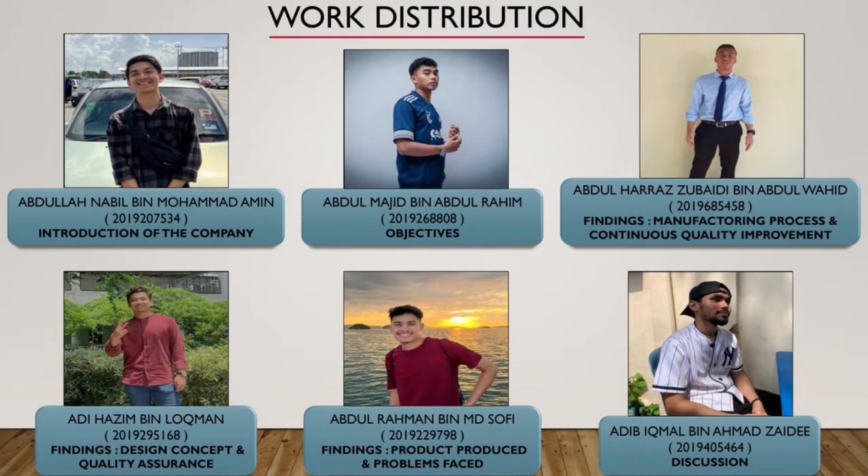My name is Abdullah Nabil, and today I will introduce to you Brembo Company. As we know, Brembo specializes in performance braking systems and components as well as conducting research on braking systems. Brembo sells over 1,300 products worldwide and is known for their aftermarket automotive brake components, including calipers, drums, rotors, and brake lines. Brembo owns the foundries that produce their initial materials and supply the manufacturing plants.

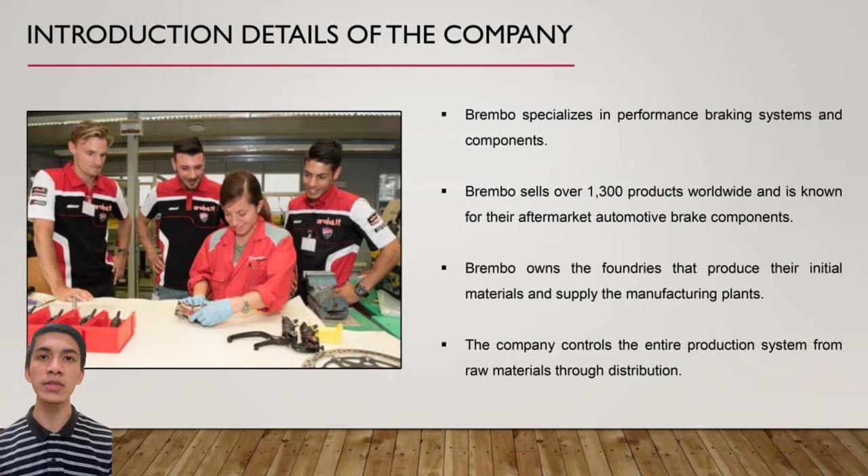In all other markets, the company controls the entire production system, from raw materials to distribution. Brembo was established in Paladina, Italy in 1961 by Emilio Bombassei and Italo Breda. The company entered into a supply contract with Alfa Romeo in 1964 and became Moto Guzzi's brake component supplier in 1966. In the 1980s, Brembo also began supplying brakes to BMW, Ferrari, Mercedes-Benz, Nissan, and Porsche. Brembo went public on the Milan Stock Exchange in 1995.

In the 2000s, Brembo purchased the UK-based racing brake and clutch manufacturer AP Racing, a former division of Automotive Products. An official press release in 2014 announced an RM392 million expansion of the Michigan facility. Later that year, Brembo also announced plans to invest RM151 million into a 31,500 square meter production facility project to produce 2 million aluminium calipers yearly.

In 2015, Brembo's deputy chairman, Matteo Tiraboschi, reported the company's 2014 sales growth of 15% and a net profit increase of 45%. For now, Brembo is a world leader in the design, development, and production of braking systems and components for vehicles. The company currently operates in 15 countries on 3 different continents with 29 production and business sites and a workforce of over 12,000 employees.

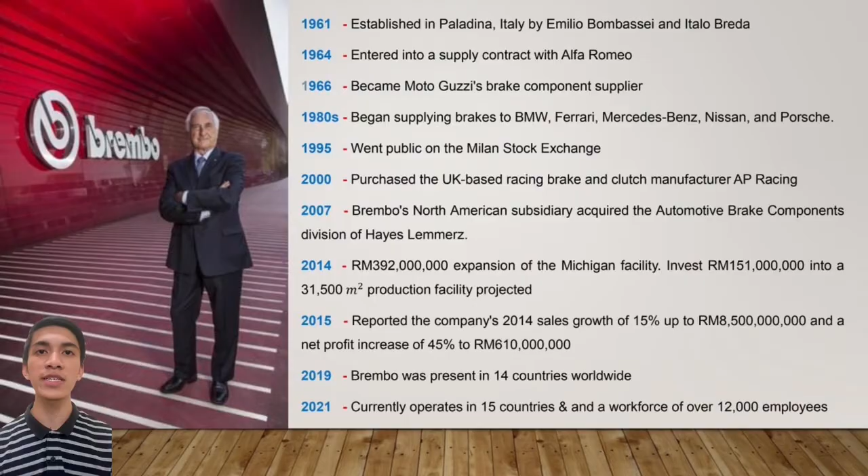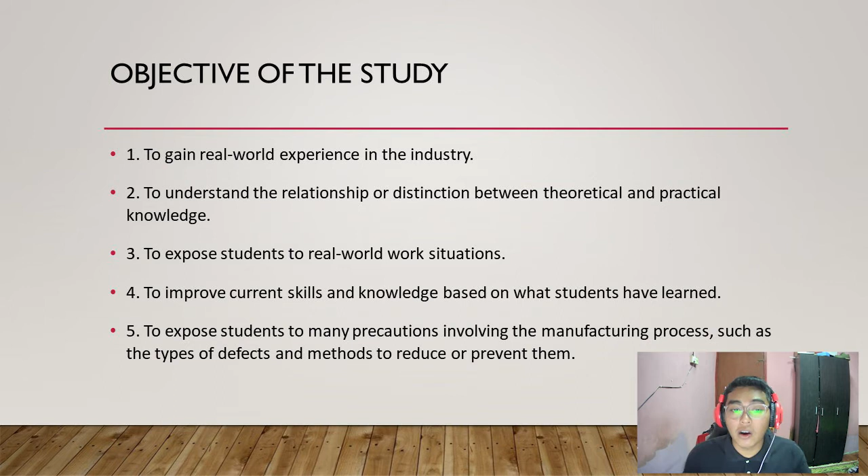Today I will present the objectives of the study. The first one is to gain real-world experience in the industry. The second one is to understand the relationship or distinction between theoretical and practical knowledge. Number 3, to expose students to real-world work situations. Number 4, to improve current skills and knowledge based on what students have learned. And number 5, to expose students to many precautions involving the manufacturing process, such as the types of defects and methods to reduce or prevent them. Thank you.

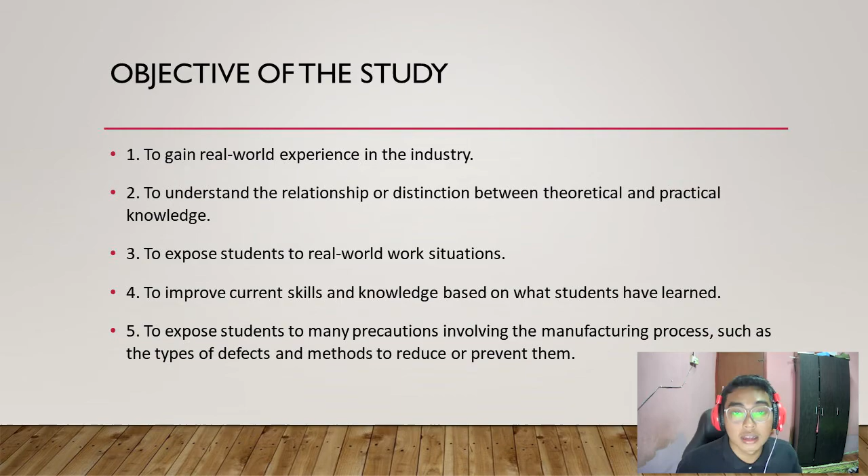There are 12 manufacturing processes that the brake discs need to undergo. First, preparing material. There are 2 materials used in this process, which are heat molded resin and chopped pieces of raw carbon fiber. Both materials are mixed together, as the combination of these materials will provide quiet braking.

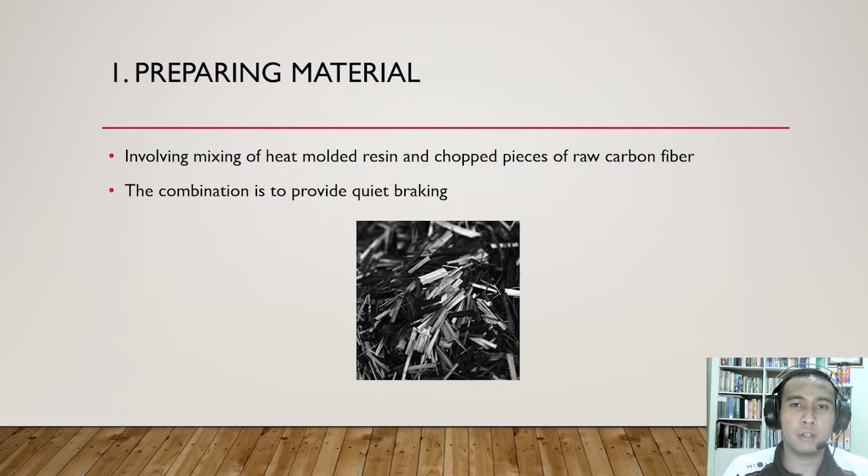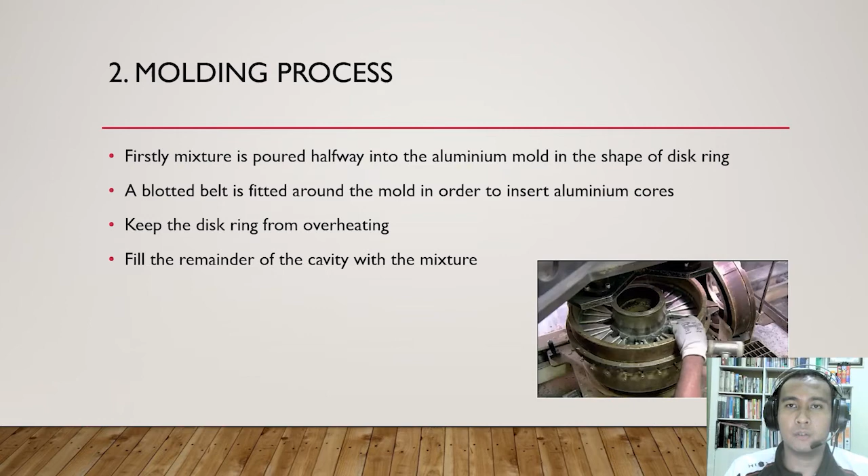Second, molding process. In this process, the mixture is poured halfway into the aluminium mold in the shape of the disc ring, and then a blotted belt is fitted around the mold in order to insert the aluminium cores. The function of the aluminium cores is to keep the disc ring from overheating, and then the remainder of the cavity is filled with the mixture.

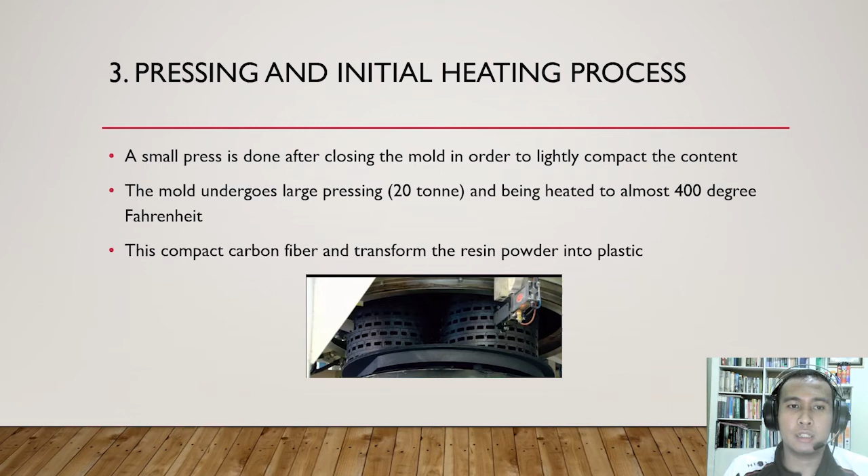Pressing and initial heating process. In this process, after closing the mold, a small press is done in order to lightly compact the content, and then a large press of 20 tons acts on the mold, and the mold is heated to almost 400 degrees Fahrenheit. This process will compact the carbon fiber and transform the resin powder into plastic.

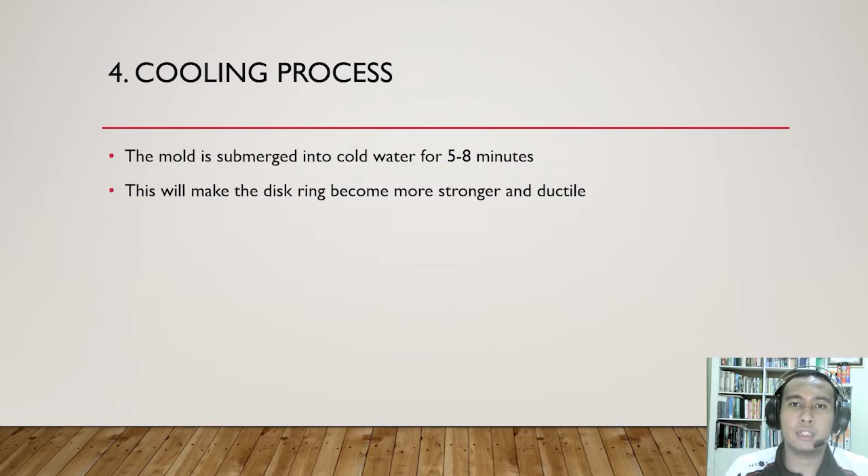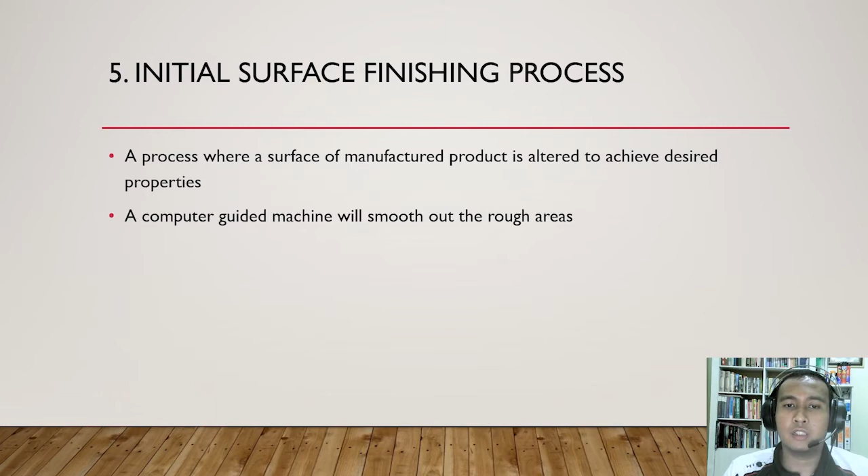Cooling process. In this process, the mold is submerged into cold water for 5 to 8 minutes in order to make the disc ring stronger and ductile. Initial surface finishing process. This process is where the manufactured product is altered to achieve desired properties. A computer-guided machine will smooth out the rough areas on the disc ring surfaces.

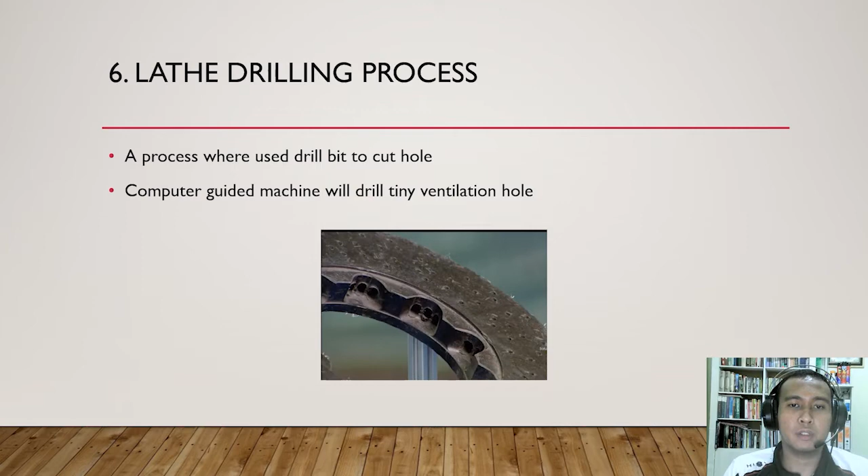Lathe drilling process. This is a process where a hole is drilled. For this process, a computer-guided machine drills ventilation holes into the disc ring.

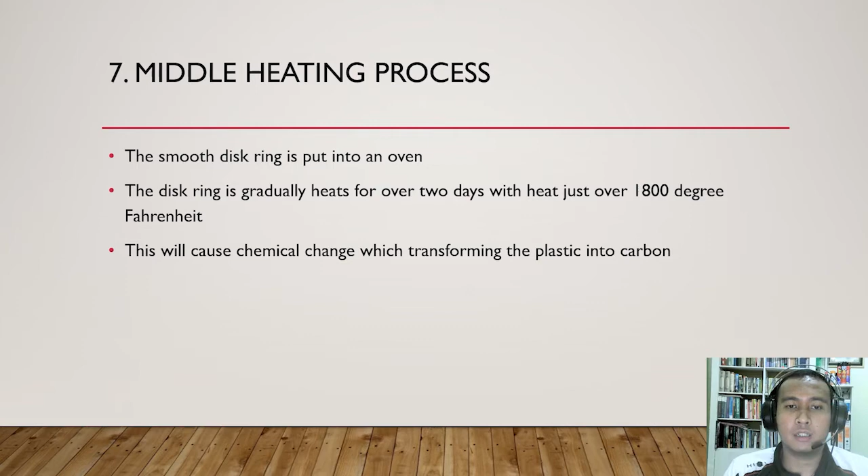Middle heating process. The smoothed disc ring is put into an oven where the disc ring is gradually heated for over 2 days with heat just over 1800 degrees Fahrenheit. This will cause a chemical change, transforming the plastic into carbon.

Final heating process. 5 mounts are positioned inside a crucible, which is a high heat resistant container. The disc ring is placed onto them. After that, the ceramic material used, which is silicon powder, is poured into the middle of the disc ring.

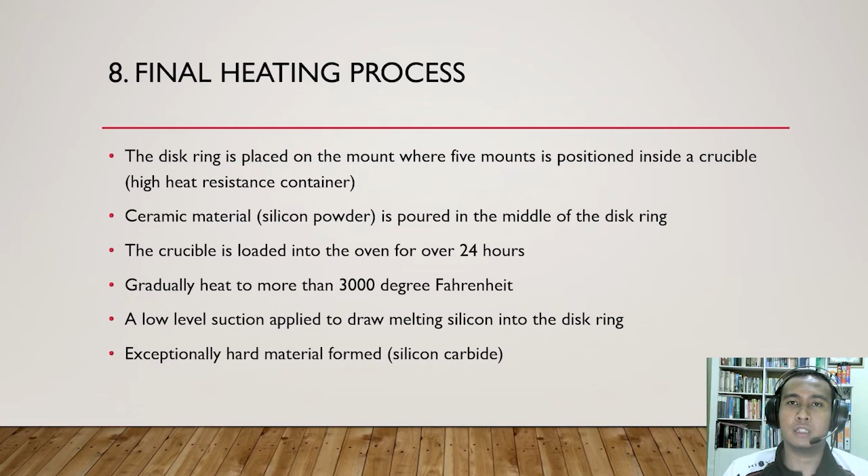Then the crucible is loaded into the oven for 24 hours, where it will be heated to more than 3000 degrees Fahrenheit. A low-level suction is applied to draw the melting silicon into the disc ring, where after cooling down, an exceptionally hard material is formed, which is silicon carbide. After the final heating process,

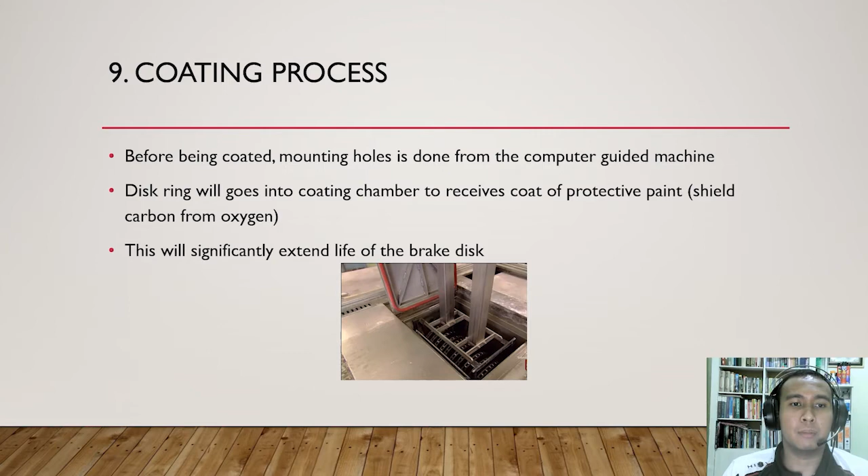a computer-guided machine will drill mounting holes on the surface of the disc ring, and then the disc ring will go into the coating chamber to receive a coat of protective paint, which is to shield the carbon from oxygen, as at high temperature oxygen burns carbon. Thus, this process will significantly extend the life of the brake disc.

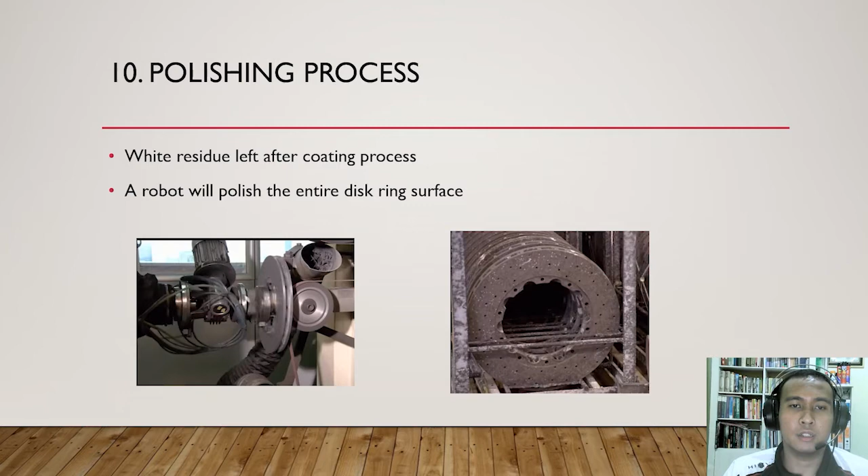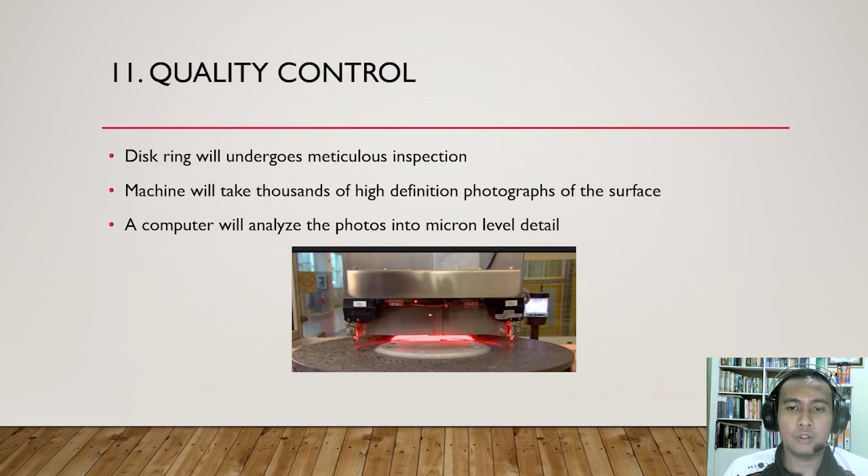After the disc ring is coated, white residue is left on the surface, so a robot will polish the entire disc ring surface to clear it of the white residue. Quality control. The disc ring will undergo meticulous inspection where a machine will take thousands of high definition photographs of the surface, and a computer will analyze the photos in micron-level detail. This is to ensure the product has achieved the properties needed.

Lastly, after completing 11 manufacturing processes, a bell or circular component is placed in the middle of the disc ring to connect the brake disc to the vehicle. The bell is made of either aluminium or stainless steel and bolted into the mounting holes in the disc ring.

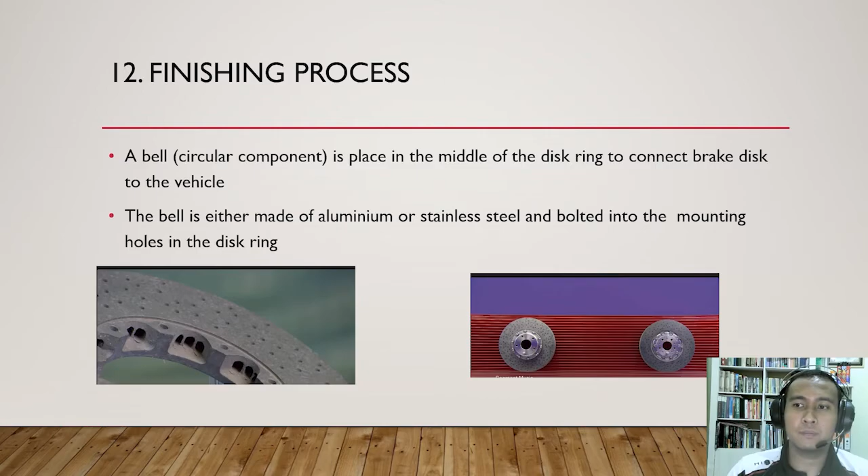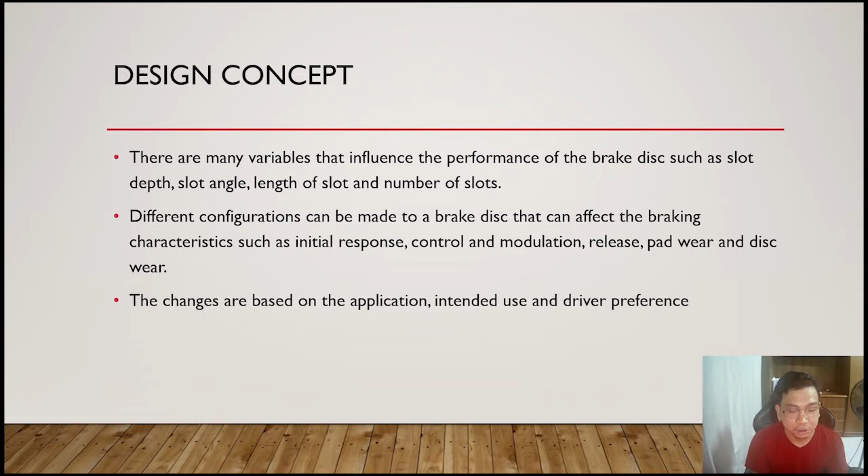So for the design concept, there are many variables that influence the performance of the brake disc, which are slot depth, slot angle, length of slot, and number of slots. Different configurations can be made to a brake disc, and they can affect braking characteristics such as initial response, control and modulation, release, pad wear, and disc wear. The changes are made based on the application, intended use, and driver preference.

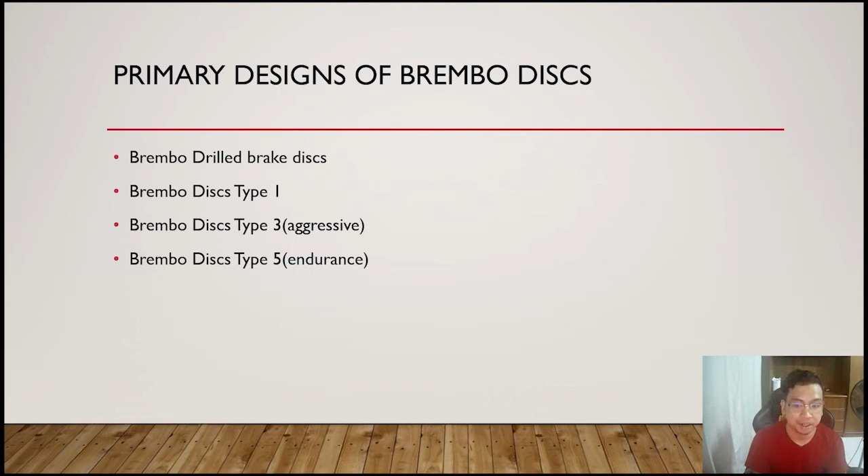So there are 4 primary designs of Brembo disc, which are the Brembo drilled brake disc, Brembo disc type 1, Brembo disc type 3, which is for aggressive use, and Brembo disc type 5, which is for endurance. So this is the design of the Brembo drilled brake disc. This disc can be used in a variety of applications, operating temperatures, and driving conditions, including wet weather.

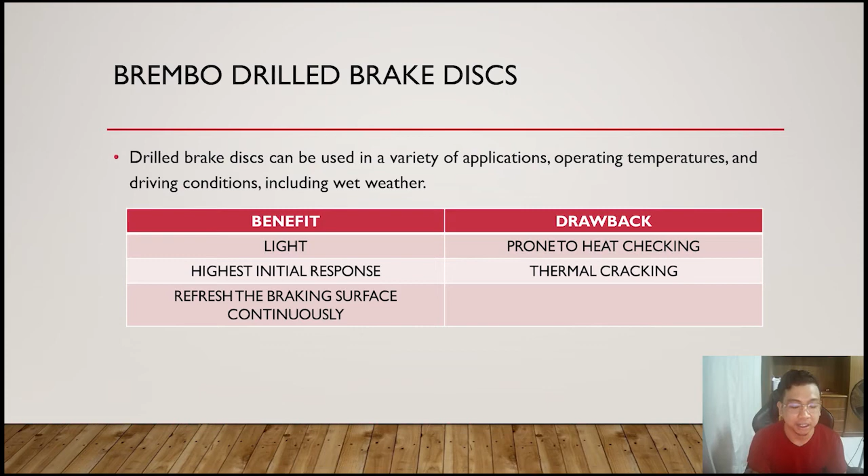So the benefits are: it is light, it has the highest initial response among the 4, and it refreshes the braking surface continuously. And the drawbacks are: it is prone to heat checking, and it is also prone to thermal cracking when the temperature is exceptionally high.

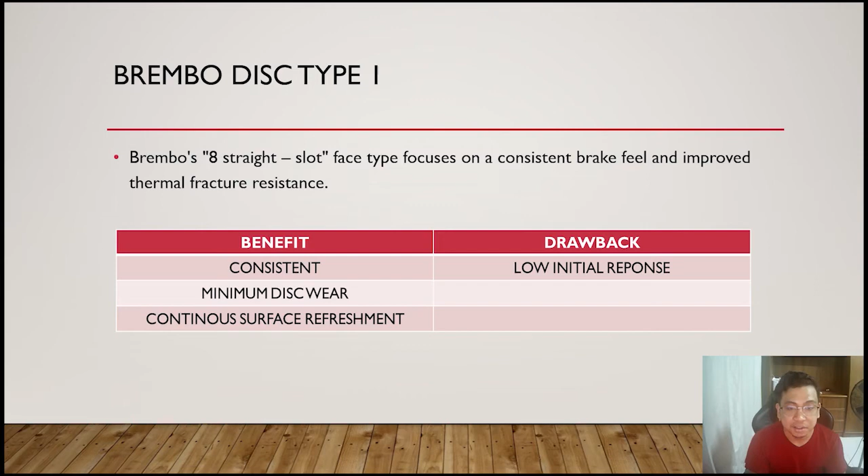This is the design of Brembo disc type 1. This disc focuses on a consistent brake feel and improved thermal fracture resistance. The benefits are: it is consistent, it has minimum disc wear, and it has continuous surface refreshment. And the drawback is it has low initial response.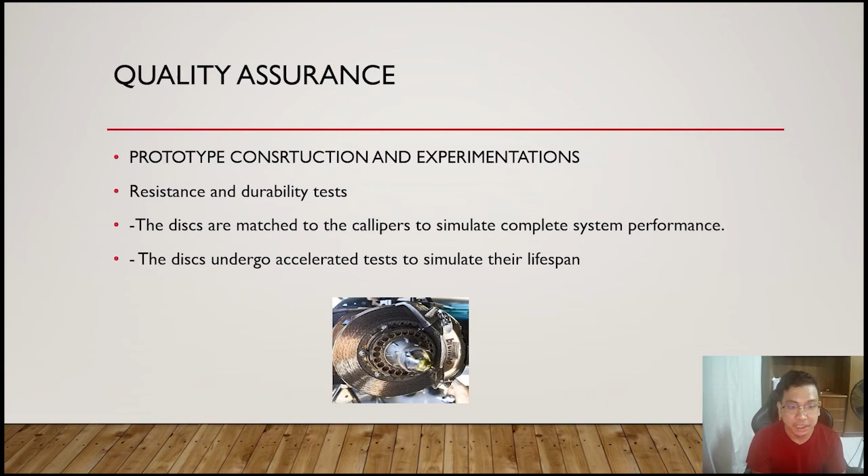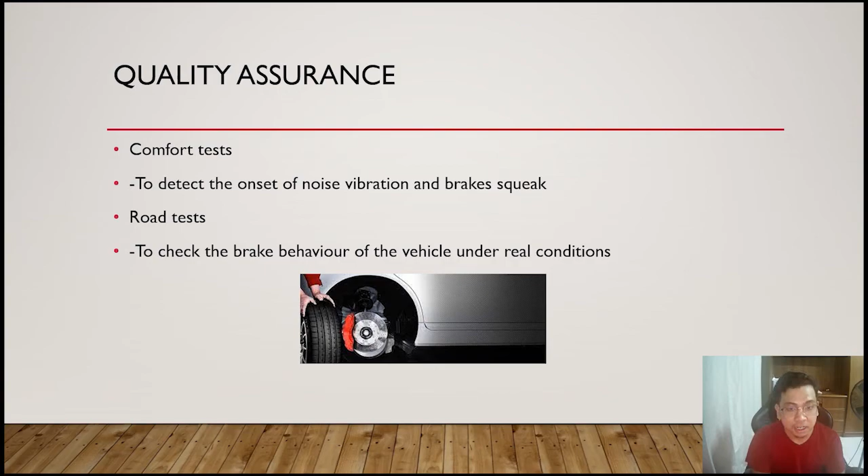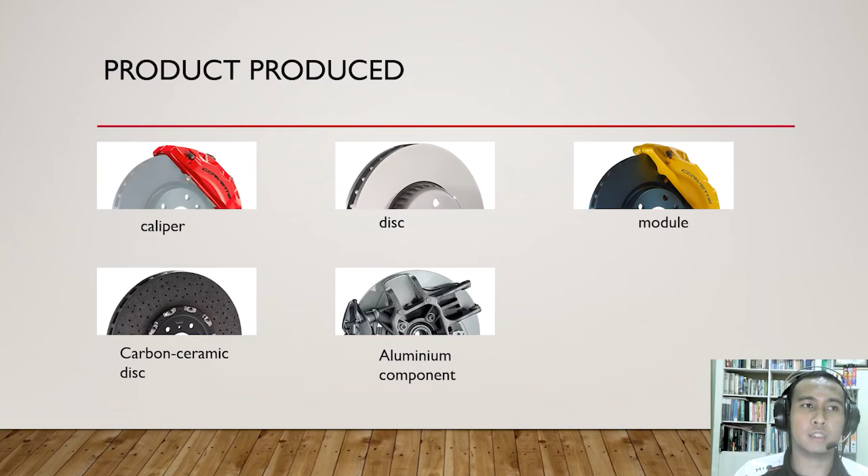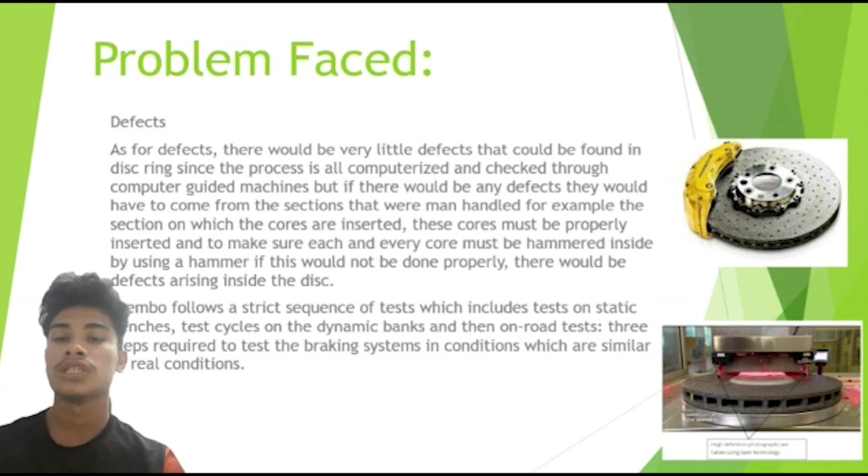Brembo follows a strict sequence of tests, including tests on static benches, test cycles on dynamic banks, and road tests, with 3 steps required to test the braking systems in conditions similar to real conditions. Brembo's objective is to achieve complete client satisfaction with a safe and reliable product, along with comprehensive pre-sales and after-sales, technical, commercial and logistic support capable of anticipating the most crucial aspects. Quality is a challenge to achieve zero risk in the product, the process, the materials used, and for the environment.

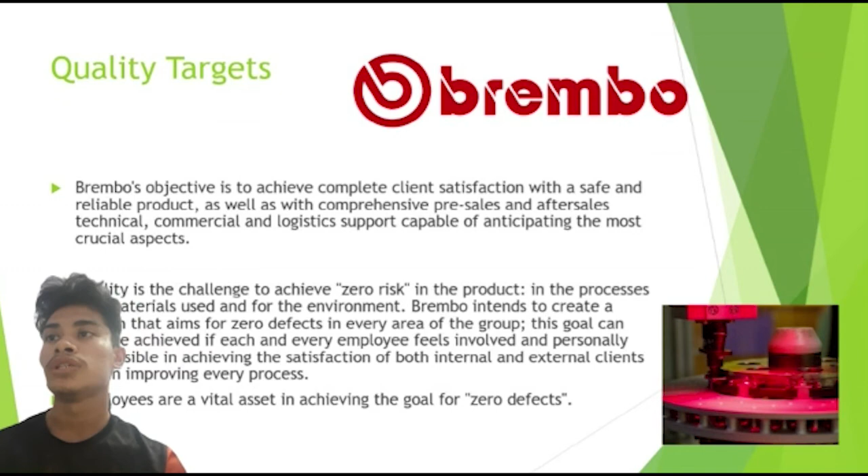Brembo intends to create a system that aims for zero defects in every area of the group. This goal can only be achieved if each and every employee feels involved and personally responsible in achieving the satisfaction of both internal and external clients and improving every process. Employees are a vital asset in achieving the goal for zero defects.

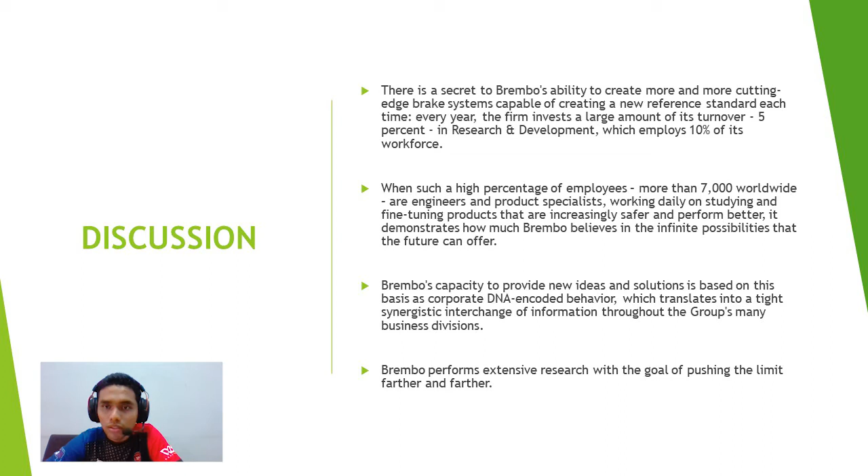There is a secret to Brembo's skill at making more and more cutting-edge braking systems, each time capable of setting a new reference standard. Every year, the company invests a significant portion of its turnover, 5%, in research and development, an area that involves 10% of its personnel. With such a high percentage of employees, of which there are more than 7,000 worldwide, made up of engineers and product specialists working daily on studying and fine-tuning products which are increasingly safer and higher performance, it shows just how much Brembo believes in the infinite possibilities that the future can offer.

Brembo's ability to propose new ideas and new solutions is a foundation and behavior that is encoded in the corporate DNA, which translates into a close synergistic exchange of information between the group's various business areas.

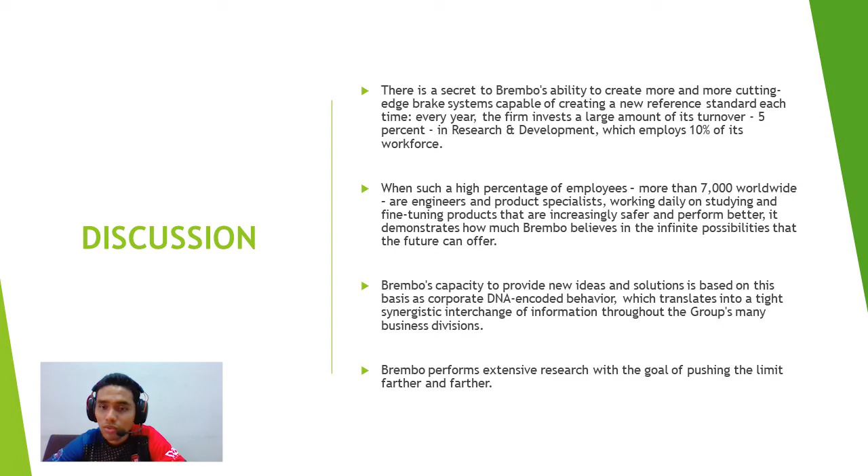Brembo conducts comprehensive research aimed at pushing the limits farther and farther. It is constant research that does not stop at development and fine-tuning of higher and higher performance braking systems, but also includes experimentation with revolutionary solutions capable of improving comfort, or the application of a design capable of combining functionality and beauty. Exploration design assesses the use of new materials or the advantages offered by innovative disciplines such as mechatronics, a branch of automation engineering where mechanics, electronics and information technology interact.

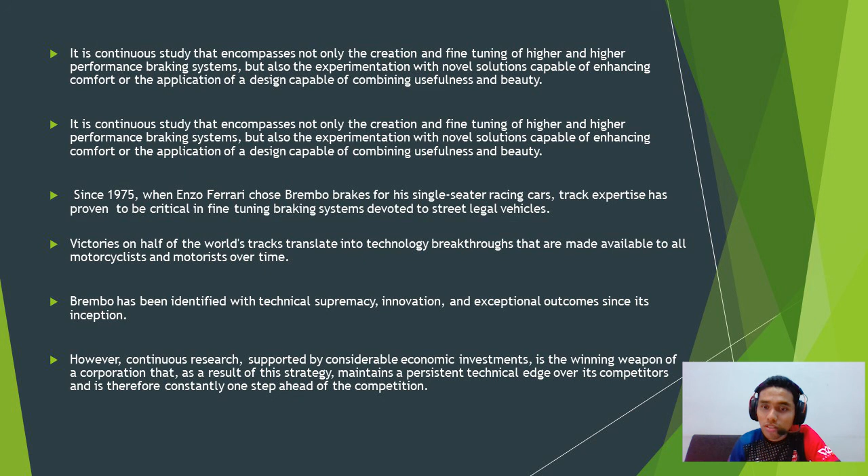Ever since 1975, when Enzo Ferrari chose to have Brembo brakes fitted on his single-seater race cars, experience on the track has proven essential to fine-tuning braking systems dedicated to street-legal vehicles. Over time, victories on half the tracks in the world translate into technological advancements made available to all bikers and motorists. Since its foundation, Brembo has been synonymous with technical superiority, innovation and excellent results. Research supported by significant economic investments is the winning weapon of a company that, thanks to this approach, maintains a constant technical advantage over its competitors and is therefore always a step ahead of the rest.